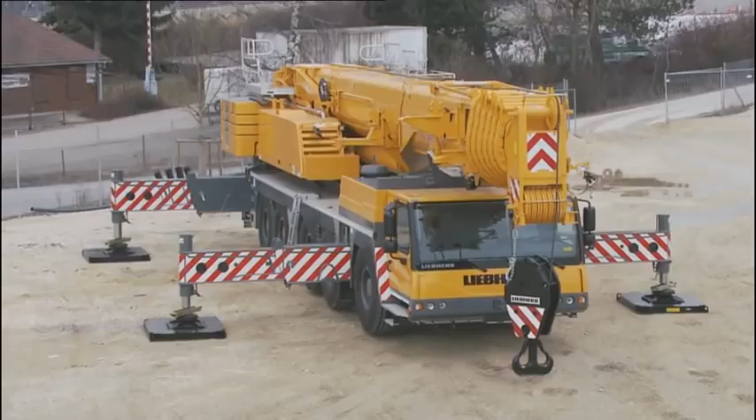Hello there, I'm a modern mobile crane from Liebherr. I'm very strong and pretty intelligent, but I suppose a lot of others can claim the same. I am an all-terrain telescopic crane, which means I can get to just about any location where there are heavy loads to move. And this is my boss. He has a fairly easy life because he has me. Well, actually, sometimes his life is not that easy. And that's why we've made this film.

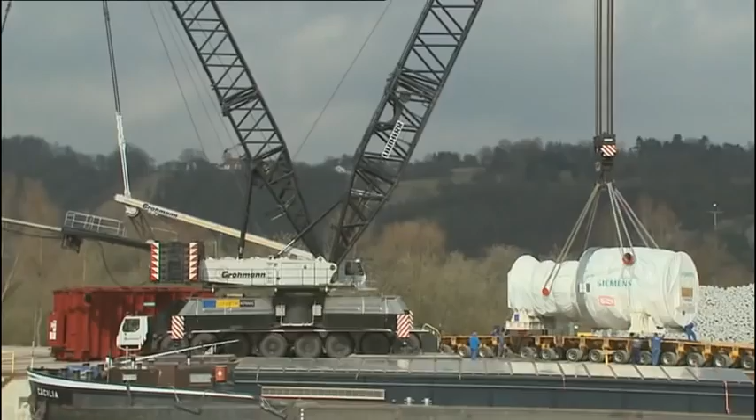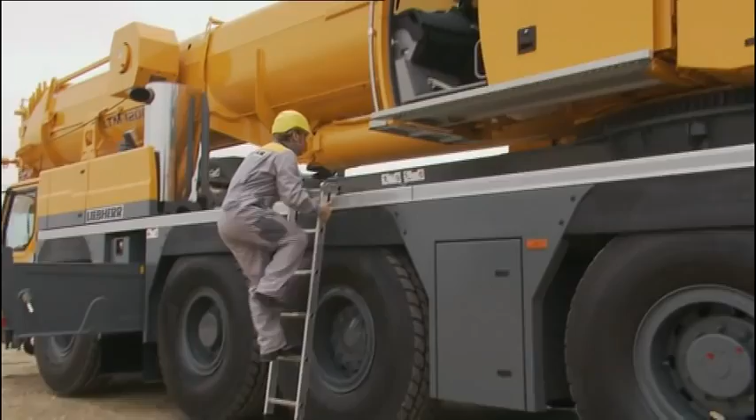And these are my relatives. Telescopic cranes. Lattice boom cranes. And crawler cranes. A really strong bunch. My designer thinks I shouldn't show off so much. He can't hear me right now. He works too hard, the poor bloke. He always says, "We stand out due to our performance and precision." What does he think we do all day?

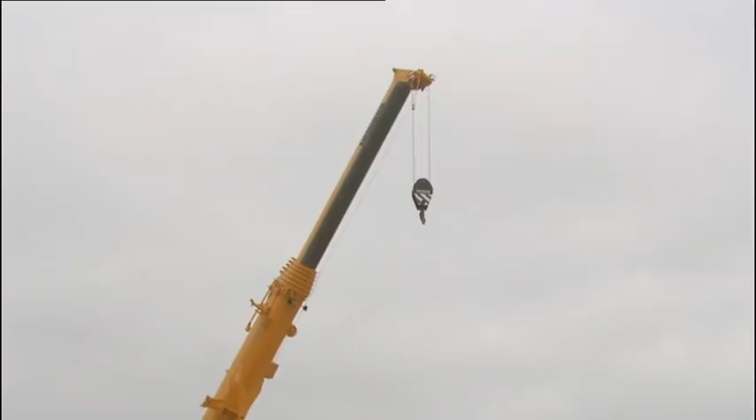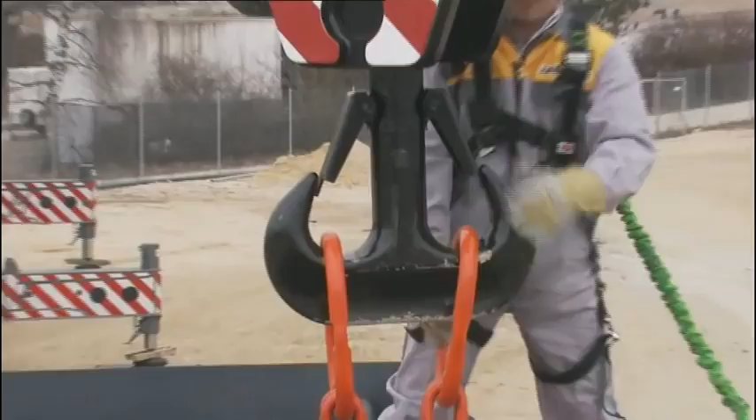But there's one thing that gives me and my pals a real headache. Actually, it's invisible and light as a feather, but it has a massive effect. The answer, my friend, is blowing in the wind. Exactly. We're talking about the wind, or rather, about too much wind. Of course, I have nothing against a light breeze, but unfortunately wind can get really nasty and even really dangerous. Actually, it should be banned, but that could be a little difficult. If you got rid of the wind, there'd be no wind power, and then we'd have nothing to do.

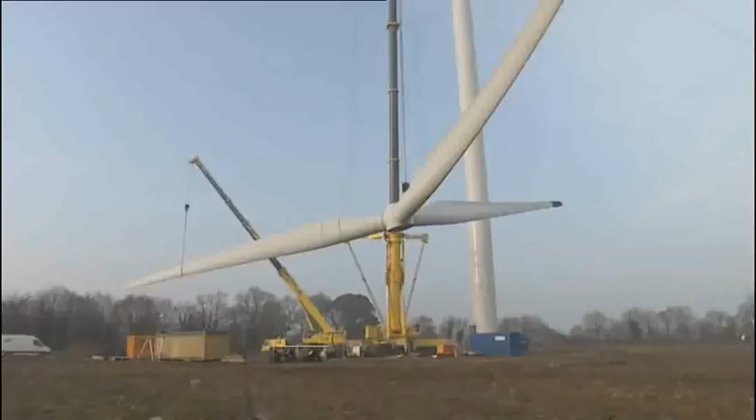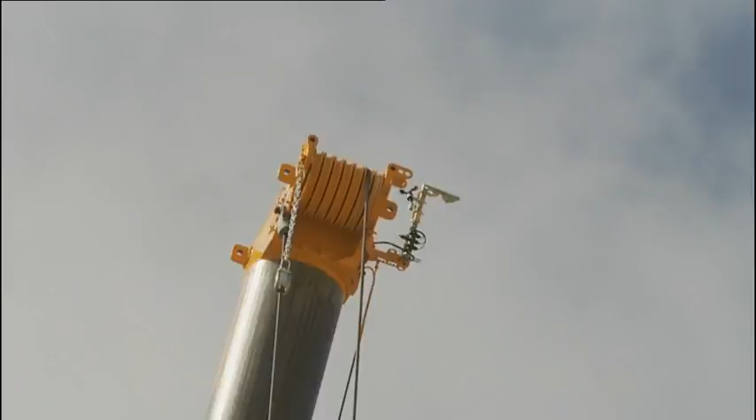And on the subject of wind power, we can see it in action here. But if you've got a rotor star on the hook and then you get a powerful gust out of nowhere, you soon stop laughing. My boss and I know, of course, what the current wind speed is. We have our anemometer at the top of the crane. But these damn gusts are completely unpredictable. My clever LICCON control does what it can, but it can't see into the future. Not yet anyway, but I'm sure they'll come up with something at some stage.

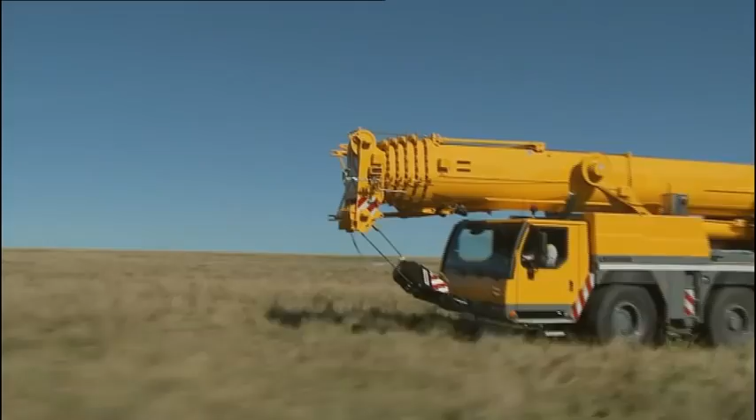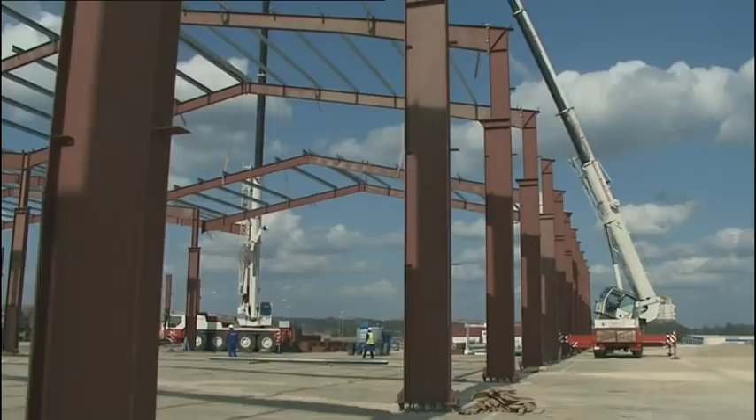Actually, my colleagues and I are real outdoorsmen. We're always out in the countryside, with bushes and trees, or sometimes up in the mountains, in villages, in towns, and in industrial parks. The wind is slowed down in different ways. The roughness of the environment, that's what the experts call it. Just next door at the airfield, the wind might be blowing a real gale at the same time. Not surprisingly, the whole place is flat, and especially at the coast. But who am I telling?

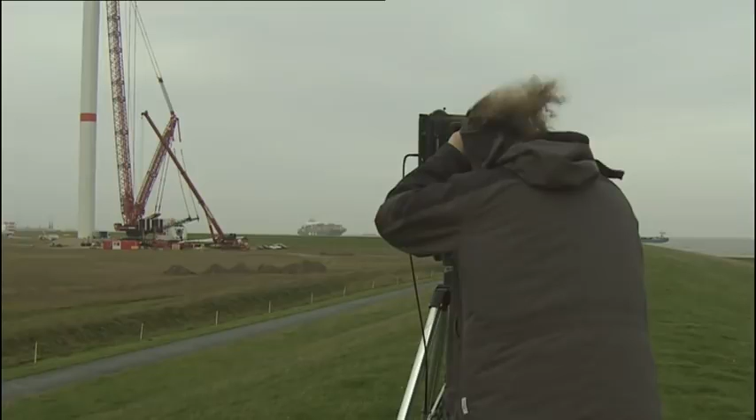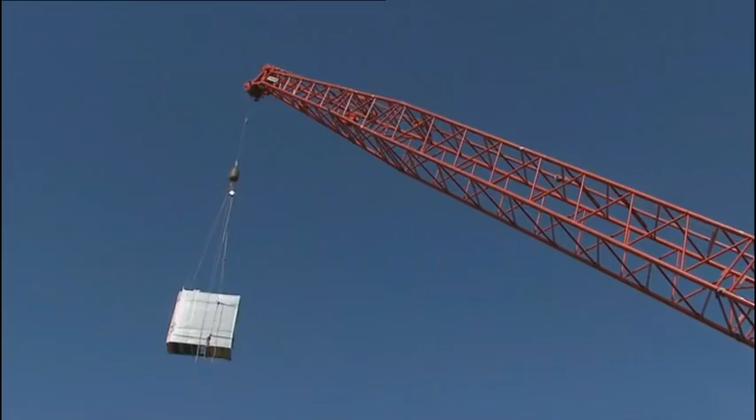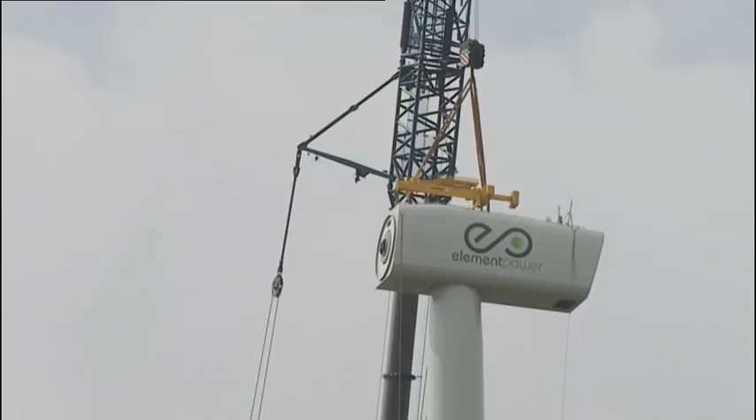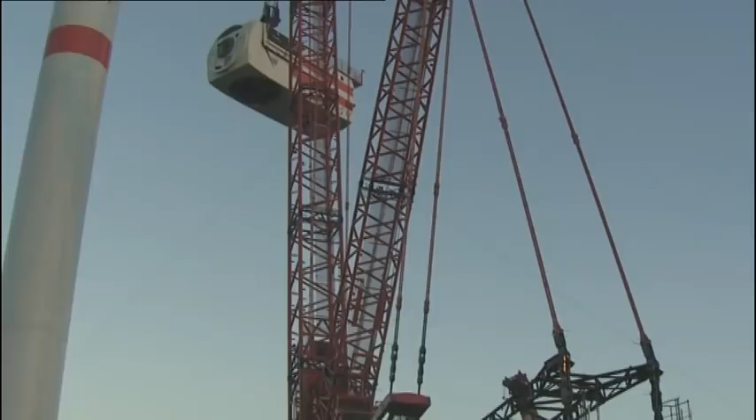Then again, our large 11200, the one with the 100-meter boom, says that higher up, the wind is always stronger. Up there, the landscape no longer has much of a role to play. And my cousin, the crawler crane, he's always busy at altitudes of 100 to 200 meters. Lifting heights, I mean. He says that he has to be very careful. If you get an unexpected gust, things can get very tricky. It's a good job that my boss can always calculate the maximum permissible wind speed.

So, let's sum up again and you can make notes. Our problem relates to gusts. The roughness of the landscape plays a role. And the higher you go, the stronger the wind blows. Okay? And why is this important? That's what we want to explain today. The important thing is to calculate the maximum permissible wind speed for your crane job, without clairvoyance.

At this point, a little theory won't go amiss. What I really dislike is wind from the front. Although it takes the strain off my boom and the luffing ram, the load stays the same, of course. My load moment limiting system then calculates much too low a value for the load, shown here in exaggerated form.

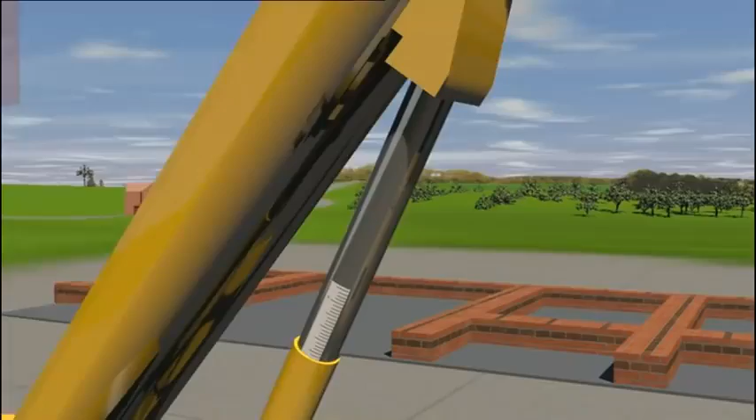This means that it cuts out too late, and there's a risk that I'll suffer an overload. If the wind comes from the rear, it places an added load on my boom system. The load indicator is too high. The load moment limiting system then cuts out earlier than the load capacity table suggests. Not exactly an ideal situation either.

And if the load actually starts to swing, and in gusting wind that can happen very fast, the boom will start to swing as well. Then the load on the crane will swing into its limit range and the load moment limiting system cuts in and out constantly. Again, not great.

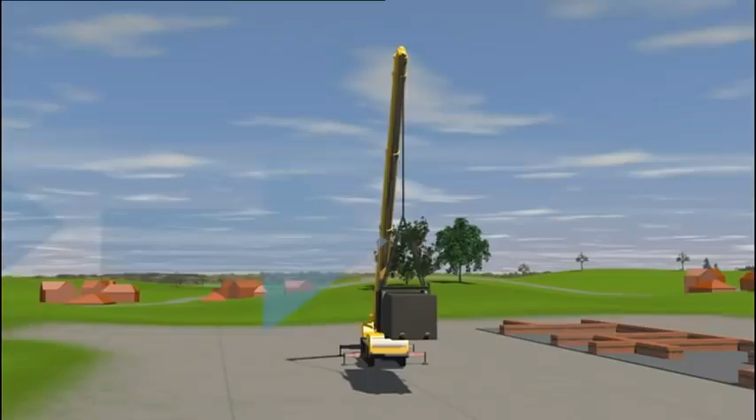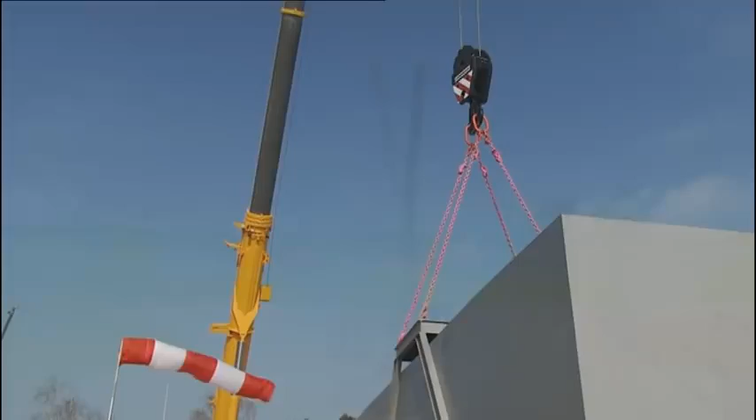Unfortunately, the wind often blows how it wants and when it wants. So sometimes it comes across and pushes the load forcefully to the side. This is the very worst scenario because my load moment limiting system is unable to detect the wind from the side. If the load provides a large surface area, things can get very hazardous indeed because my boom cannot withstand excessive lateral forces. And that makes this extremely dangerous.

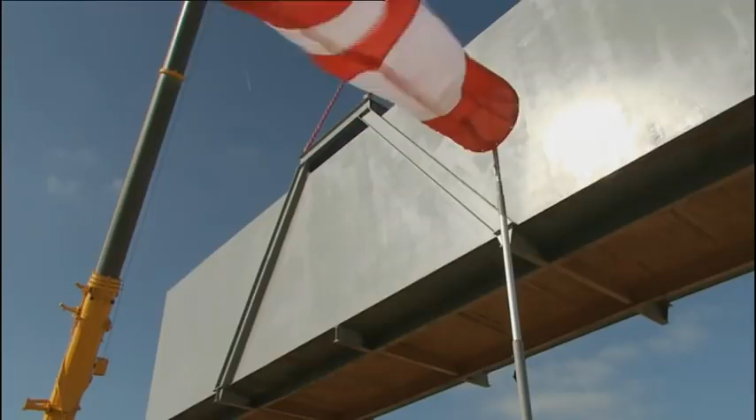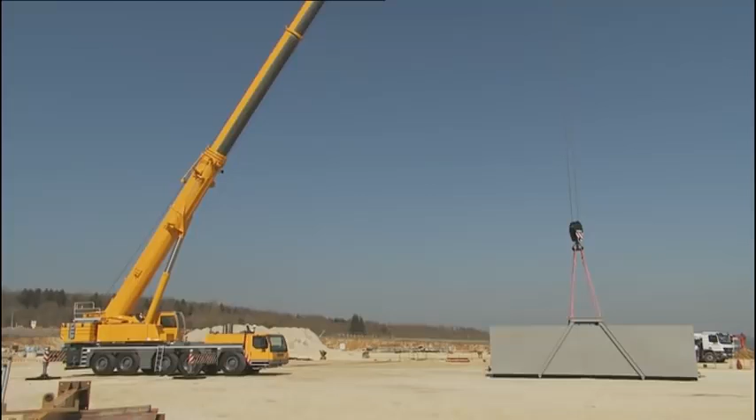Another thing, twice the wind speed means 4 times the wind load. I have a great deal of respect for this wind. It's generally absolutely harmless at the start, but then it's gone with the wind. We, that is cranes, can only fall over. And that applies to all cranes, whether they're telescopic or lattice boom versions, and regardless of who built them, just to make that clear. I can easily live without that.

For us telescopic cranes, and this also includes our heavy-footed relatives, the crawler cranes, the wind is the absolute unknown quantity. Okay, sorry boys, of course you're stronger, but you're just as afraid of the wind as I am.

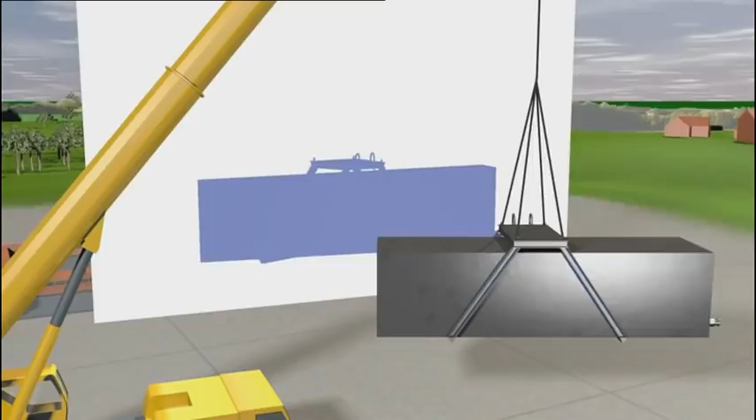Okay, we know the weight of a load, but what surface area does it offer to the wind? We can illuminate a twisting load with a searchlight. The shadow changes its size as it twists. And it's very similar with the wind. Every load has a maximum projected surface area known as AP, and that is the value that we need.

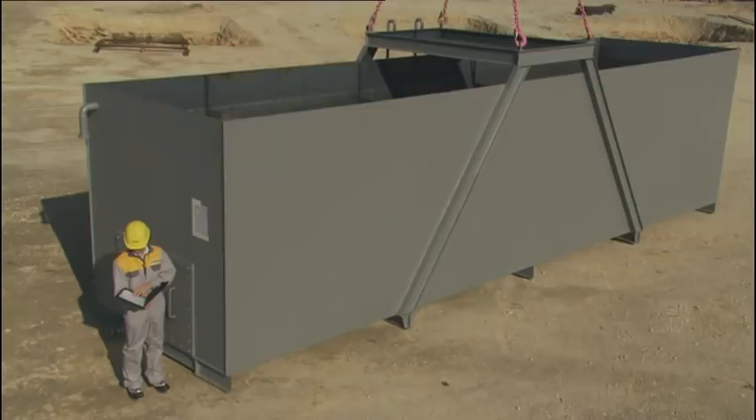The projected area of a load must always be supplied with it. If it is not supplied, we phone the manufacturer or the supplier. Or at least my boss or his job planner does. You'll see exactly why in a moment. But first of all, action!

As a genuinely mobile crane, I have a major weakness for speed. And this is just great! This is the director. Would you stay on topic? Our viewers don't have a lot of time.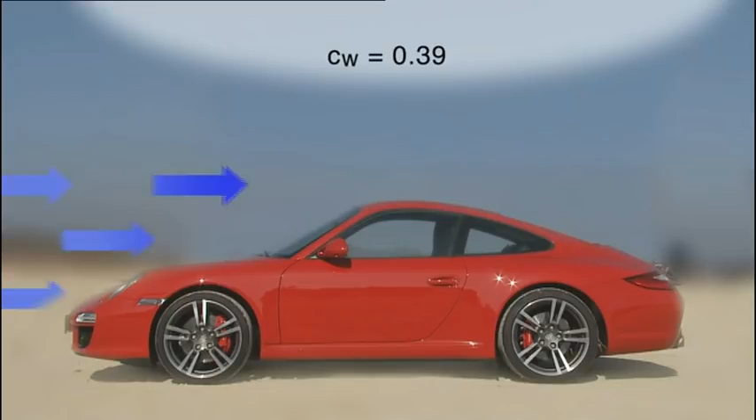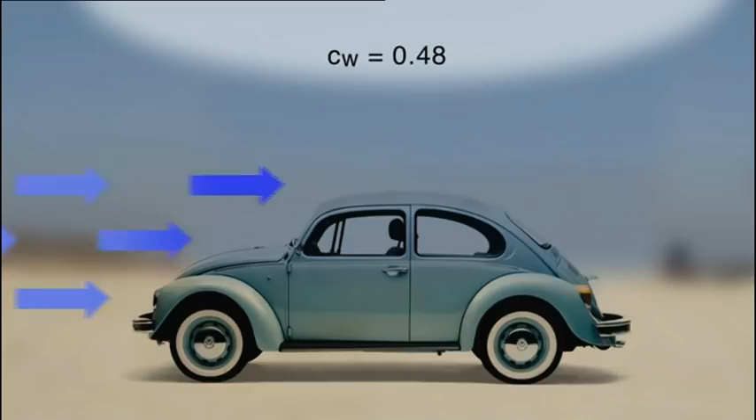Okay. Hey, what's that? The CW value, in other words, the wind resistance factor, plays a major role in fast cars and in crane jobs. I'm sure you've seen one of these before. Here are a few examples from the motor industry. My God, those were the days. That's when people still had time. Ford Model T, VW Beetle, Audi 100. Today, a wind resistance factor of approximately 0.3 is standard.

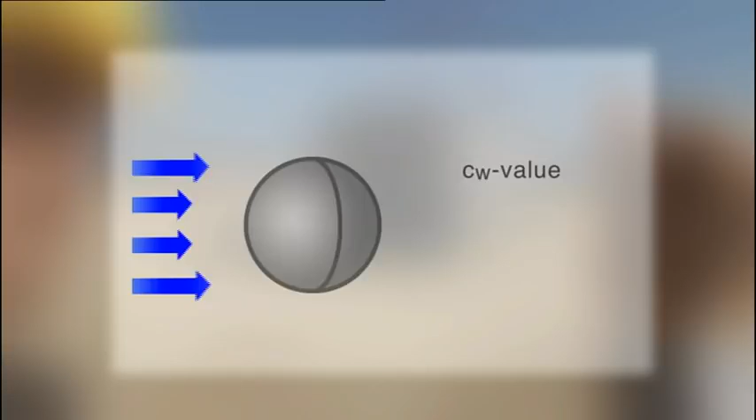And now, I suppose you want to know my CW value. Sorry, I'm going to have to look that up. Now, where do I find it? Ha, strange. I've no idea what it is. Anyway, it's the CW value of the load that's important. Here are some geometries and the corresponding CW values.

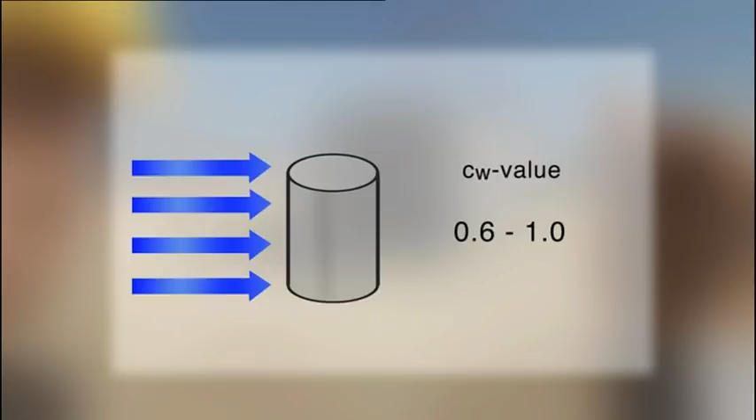Heavy loads are rarely based on design specifications. The drag coefficient, the CW value of a body, denotes how large the obstacle is for the air. You get the CW value, I'll bet you've guessed already, from the manufacturer of the load.

Just a reminder of the other details the manufacturer has to provide: the precise weight of the load, the maximum projected area, and the CW value of the load. Those are the three things the crane driver needs. Actually, to tell the truth, these values are sometimes incorrectly stated, and that causes problems for me and my boss.

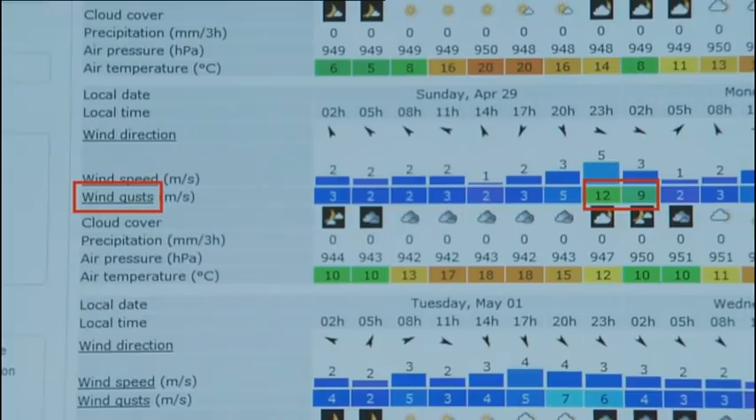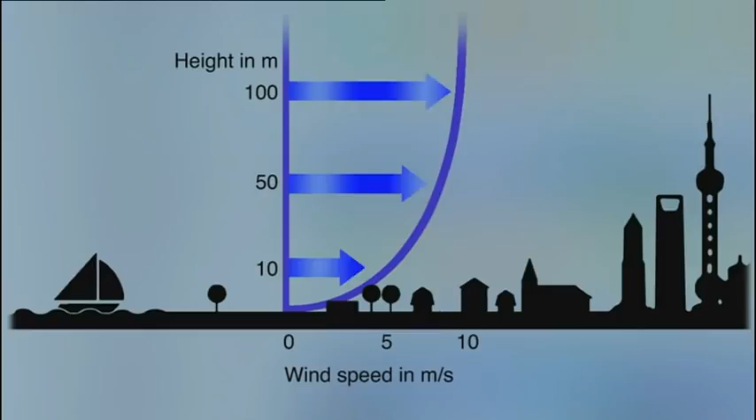So, before every job, my boss looks at the medium-range weather forecast and the expected wind speeds. There are various sources for this, including www.windfinder.com. But remember, it's the gusts that are crucial. These values refer to 10 meters above ground level, and, as we already know, the higher you go, the stronger the wind blows. You can also call the local Met Office.

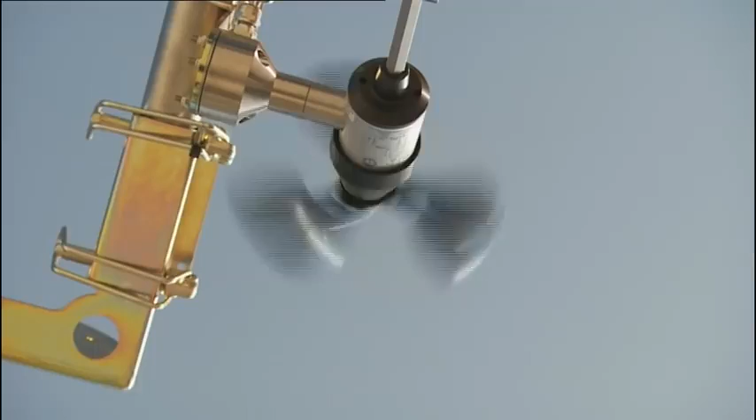Und morgen bitte auch. And then, of course, I have my anemometer. On the display, I show the wind speed measured at the top of the crane by the wind sensor. Very important. Never use these values as the sole basis for lifting a load. There are too many different factors involved.

And that brings us right to the heart of the matter. How can a crane driver know the wind speed in which a crane job can be completed, and when it should not be attempted? And it's at this point we need a little bit of mathematics. Don't worry, we can do this.

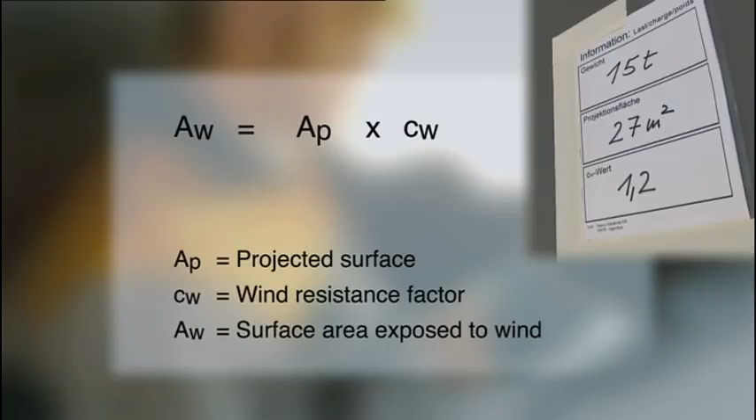We use the projected surface AP and the CW value to calculate the surface area exposed to the wind AW. AW equals AP times CW. This figure indicates how much surface area is exposed to the wind, taking into account the CW value of the load.

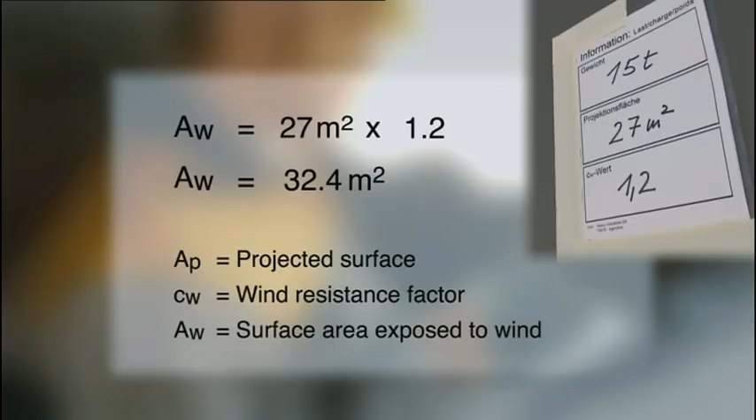The load capacity tables are based on standard EN 13000. This assumes a projected surface of 1.0 square meters per ton of load with a CW value of 1.2. Using the formula, this produces a surface exposed to the wind AW of 1.2 square meters per ton of load. The maximum wind speed from the load capacity table Vmax tab only applies to a reference value of 1.2 square meters per ton of load.

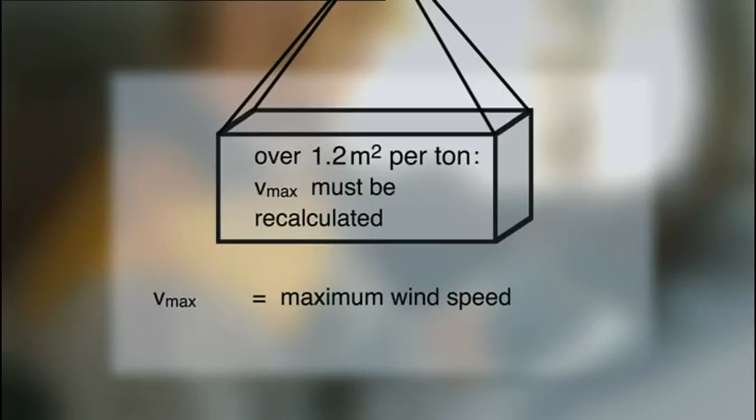If the load has a larger surface exposed to the wind, the maximum wind speed Vmax must be recalculated. There are two methods of doing this. Method 1. Let's take a rotor as an example. Weight 65 tons, CW value 1.4, projected surface 200 square meters. Surface area exposed to the wind: AW equals AP times CW. AW equals 200 square meters times 1.4, giving a value of 280 square meters.

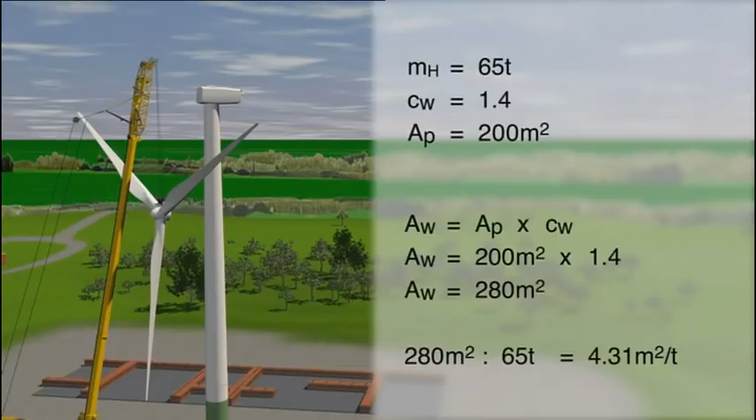280 square meters divided by 65 tons gives us a reference value of 4.31 square meters per ton of load. The value of 4.31 is much higher than the reference value of 1.2 square meters of surface area exposed to the wind per ton of load. The maximum wind speed from the load capacity table of 11.1 meters per second is therefore not applicable.

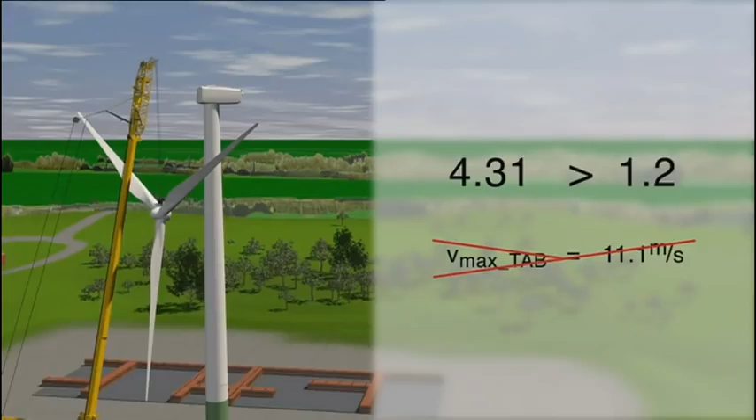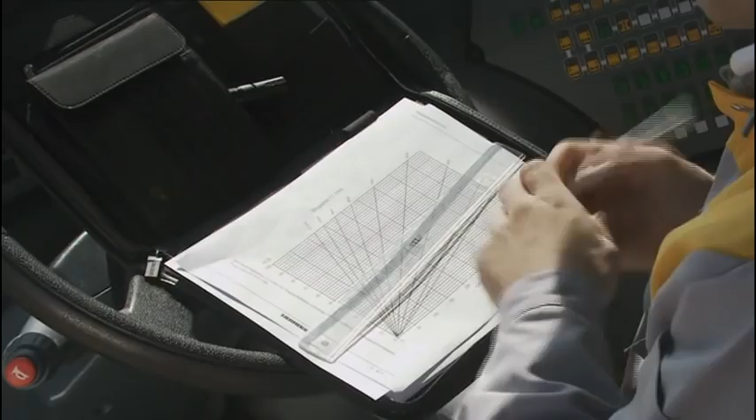Now, we can choose the appropriate wind force diagram. In this case, 11.1 meters per second. In this diagram, we can now draw the weight of the load and then the surface area exposed to the wind. The point of intersection of the two lines is the maximum permitted wind speed, in this case 5.9 meters per second.

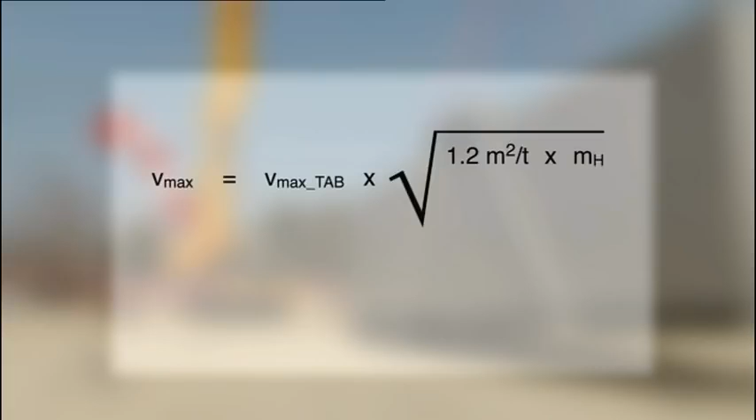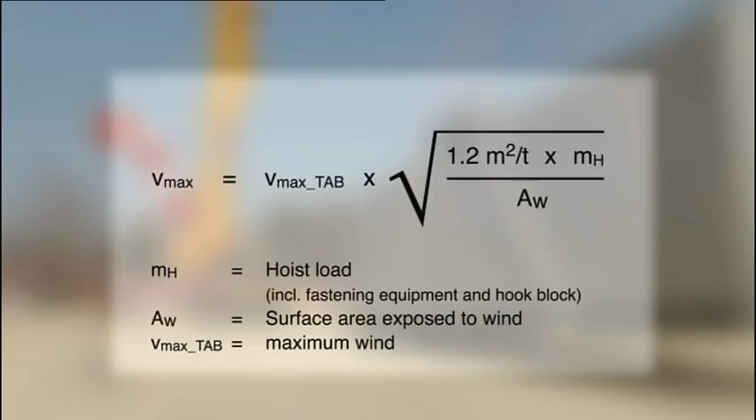Method 2. The maximum wind speed can be calculated a little more quickly using this formula. Vmax equals Vmax tab times the square root of 1.2 square meters per ton times mh divided by AW, where mh is the mass of the hoist load, AW is the surface area exposed to the wind, calculated using AP and the CW value, and Vmax tab is the maximum wind speed from the load capacity table.

So let's use the same example of the rotor. Weight 65 tons. CW value 1.4. Projected surface 200 square meters. The surface area exposed to the wind is therefore 280 square meters. Maximum wind speed from the load capacity table 11.1 meters per second.

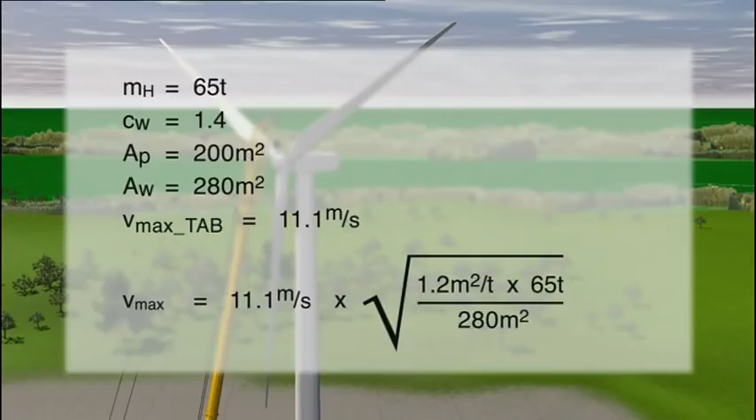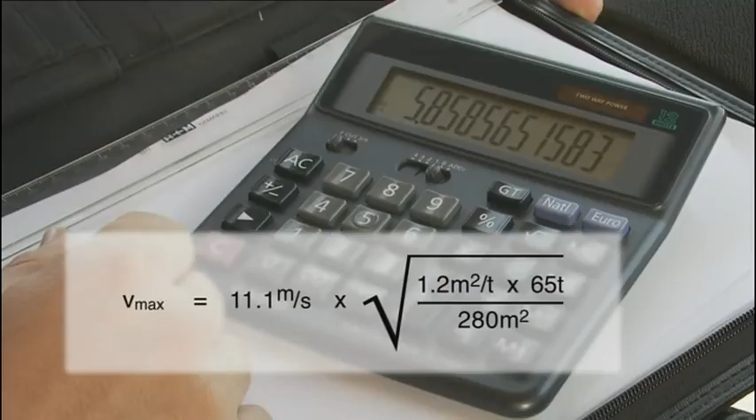We'll start with the figures under the square root. 1.2 times 65 divided by 280, then the square root, times 11.1, giving us the maximum wind speed of 5.86 meters per second. Our calculations are correct. We get the same value as when we use the wind diagram.

Important, this value is not simply transferred to the LICCON. This means that there will be no warning if this wind speed is exceeded. The crane driver must keep the calculated value in his head, or even better, visualize it and compare it with the measurements. If we then compare the calculated and the maximum wind speed from the load capacity table, in other words Vmax and Vmax tab, the lower of the two values must always be used as the maximum value.

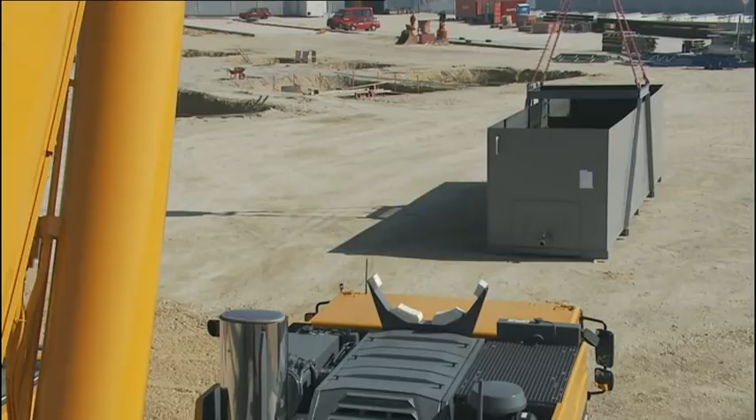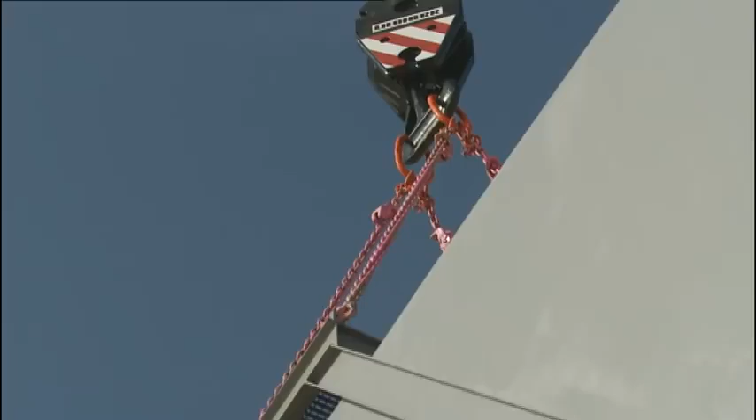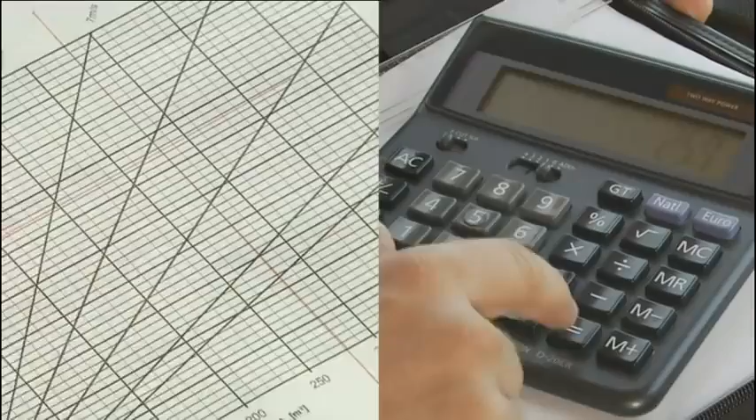So, for large loads, the maximum wind speed must be calculated individually. The three values of weight, surface area exposed to the wind, and the CW value supplied with the load are essential for this purpose. The calculation, either using the table or a calculator, is then fairly simple. These methods also apply to lattice boom cranes.

And that certainly means that you're on the safe side. In some load cases, I can certainly withstand more wind, but all that has to be calculated precisely. The statics experts at Liebherr can do all this, and if you want, you're welcome to call them.

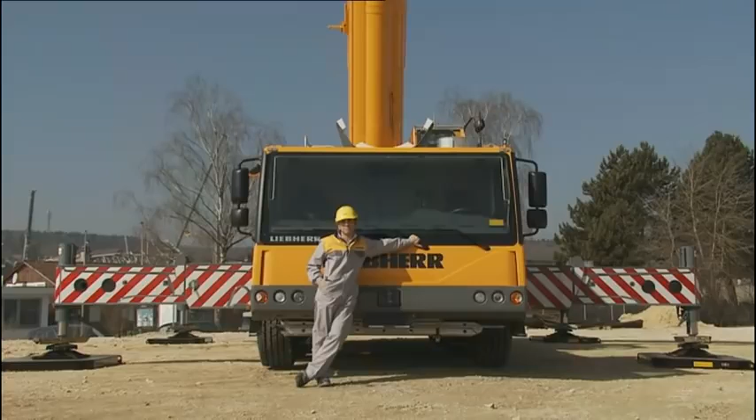Anyway, my boss has understood it all. But he's got me, of course, hasn't he?

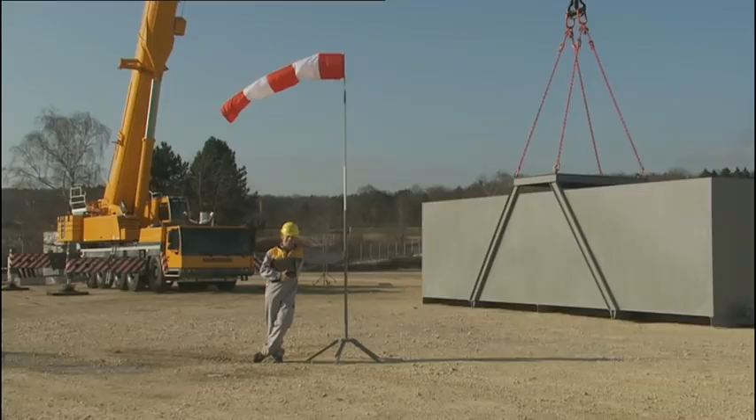The answer, my friend, is blowing in the wind.

The answer... Oh, that poor bloke's still going. Well, I suppose even the strongest wind calms down at some stage.

And don't forget, a crane driver needs three things: weight, projected surface, and CW value.